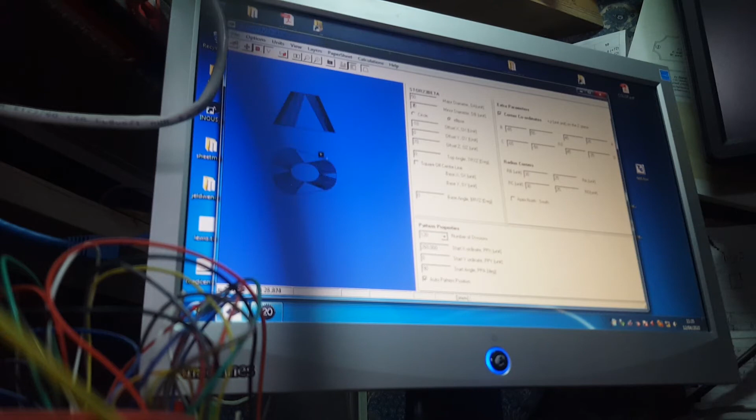Right, part 2 of the 3D metal form for the mask design. I used my own software many years ago to design these sort of things. I was a sheet metal worker in my youth, and I export it as a 3D file, so I don't need to go into that other than we've got a 3D DXF. So I'll just import it again.

So insert, file, from 3D DXF. Now I've done it in inches on my software, so I need to scale that down uniformly by 1 divided by 25.4, which is 0.039.

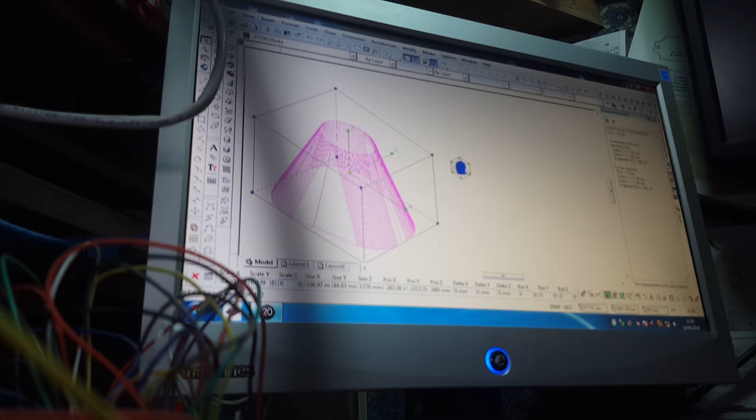0.039, right. So if we look at that from the top, we can see it's about 108 mil in the X, 84 in the Y, 70 in the Z, which is what it should be. There's a little rounding factor on that 0.039.

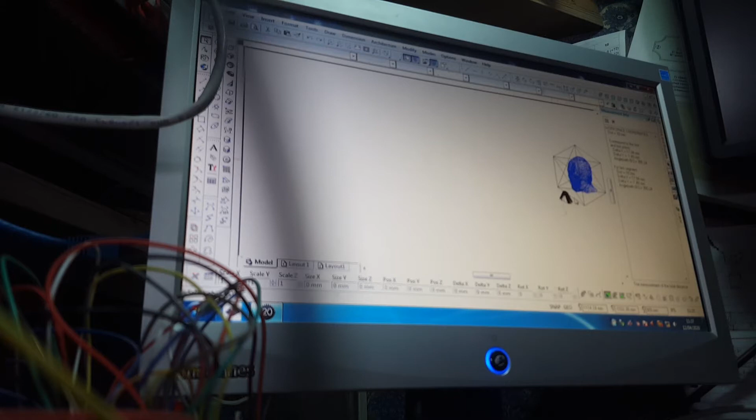Right, so pick that up, bring it over to my scaffold. Press D to move the default reference, place it on the base of the mask. I'll put it in the middle of that temporary scaffold. Right, you've got X, Y and Z. I want to spin it around Z 90 degrees, and I'll spin it round X 90 degrees.

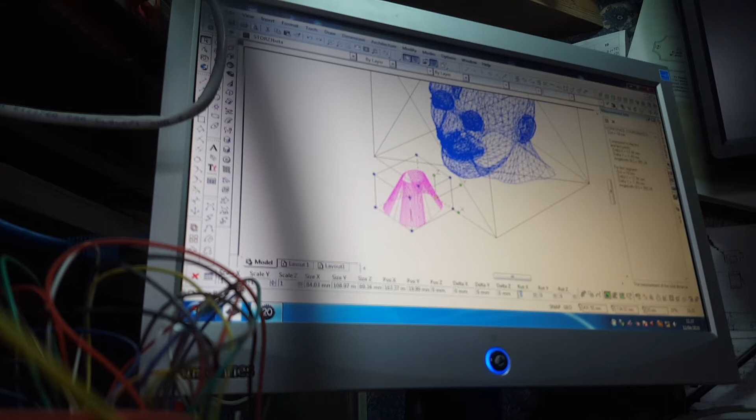Right, now how high do we take it? Well, let's just bring it up to the middle by snapping on that midpoint. Let's look from the front.

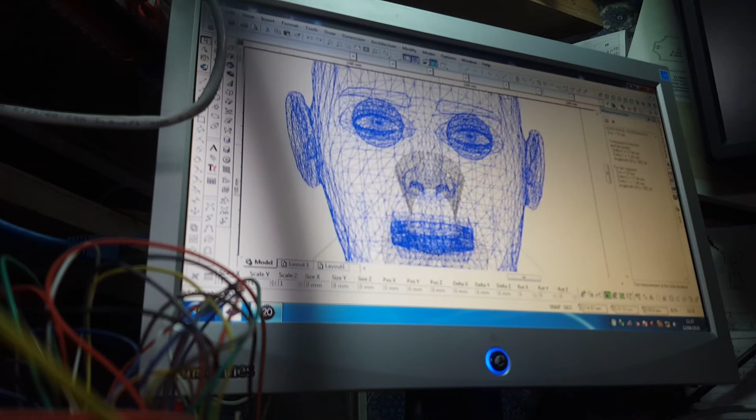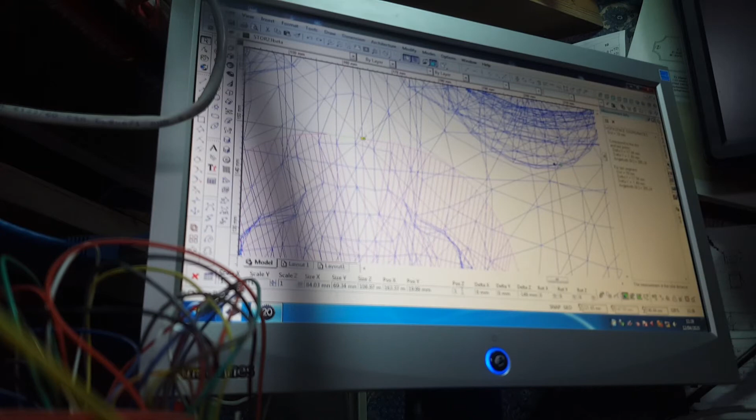Right, I can see it wants to go up a touch, not much, but click on it and you'll see it says position X, Y and Z. So basically at the moment it's position 20 mil due to where the head's drawn in absolute space, so just make that up a touch more, so 30 mil. Sorry, I've got to be doing Z, which is 150, that's what it should be, yeah. 170.

And that takes it up. It looks like it might be interfering with the eyes a little bit. Let's have a look from the side. Not bad, I think I'll bring it down 10 mil, down to 160.

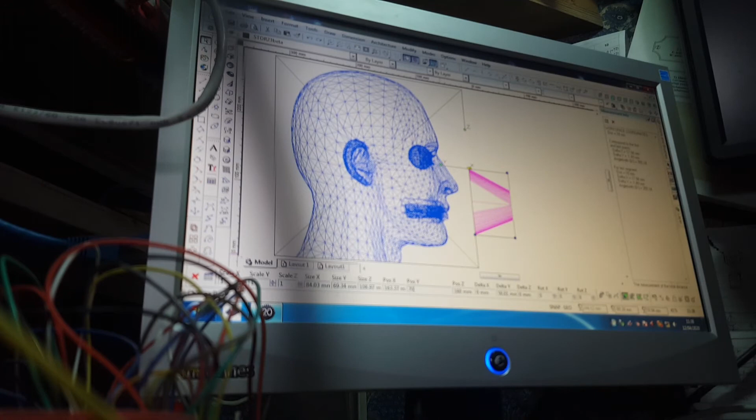Right, now I need to translate it in towards the face. That is on the Y. At the moment the position on the Y is at 20 mil, so it wants to be positive. Let's go for 70 mil again. Well, you can see there's a gap there, so I want to go in another 5 mil at least. I know, I'll call it 10.

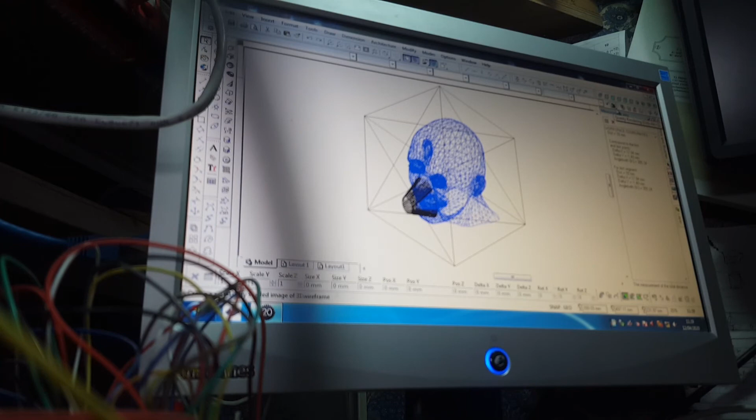Yeah, that looks fairly good. Let's look from the front again. Right, and let's do an ISO view and a quick render, so you click on the render button.

Yeah, it's starting to look good, but the lighting isn't set up, so I need to just have a look at it in hidden line, be easier. So I did a right button click and chose hidden line.

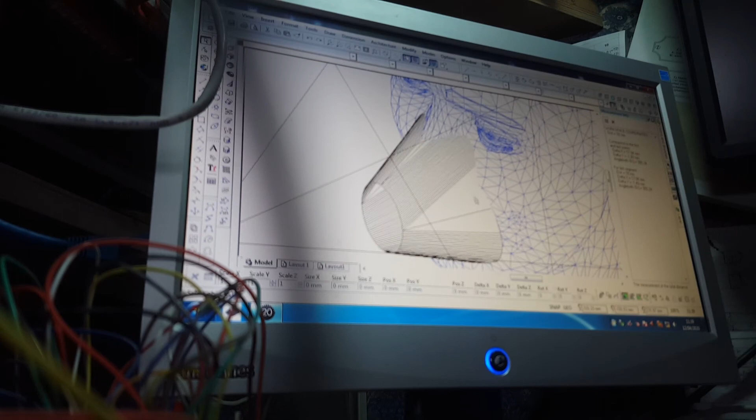So yeah, that's shaped around the nose quite well. You can see that it doesn't interfere with the face there much. But I'm going to play about with this until I get the right sizes, or what I think are the right sizes.

And then basically I'm going to form a PET bottle over this with the spout in the middle of this ellipse. I'll heat the sheet metal form with a candle or in the oven, and then push the PET bottle on there, or come up with some gravity method, like put a brick on it or something, and then see if we can create these masks quickly and efficiently.

And then I'll get the sheet metal template to... I'll also get a template for the PET bottle so you can draw around it, cut it out with a Swiss Army knife, and then keep banging these masks out, because we're going to need a lot of masks in the third world country to try and keep people safe when they're approaching people with COVID-19. Okay, that'll do for this one.